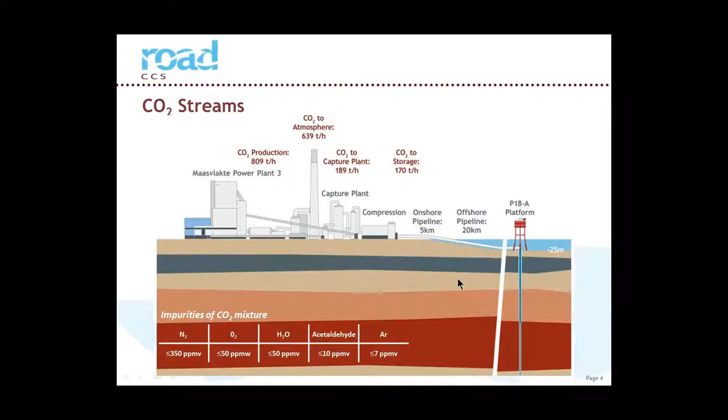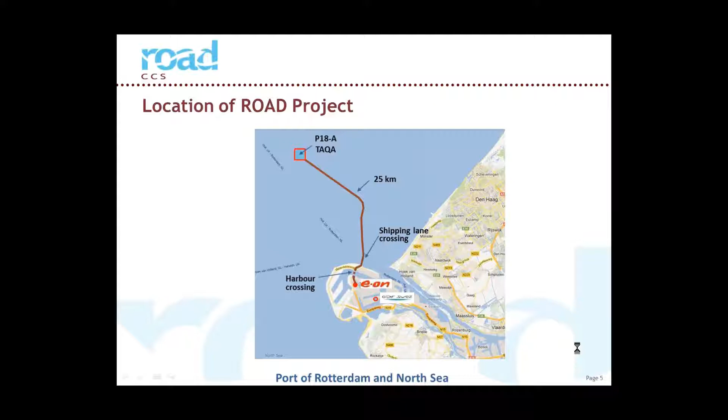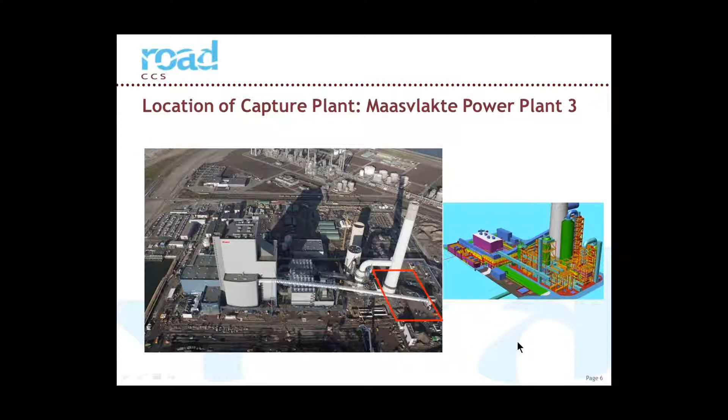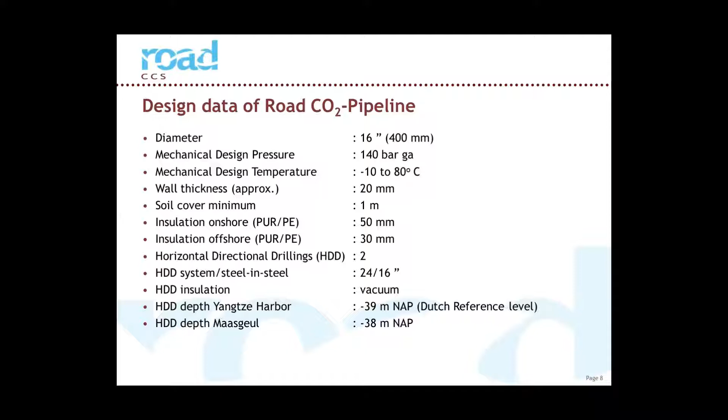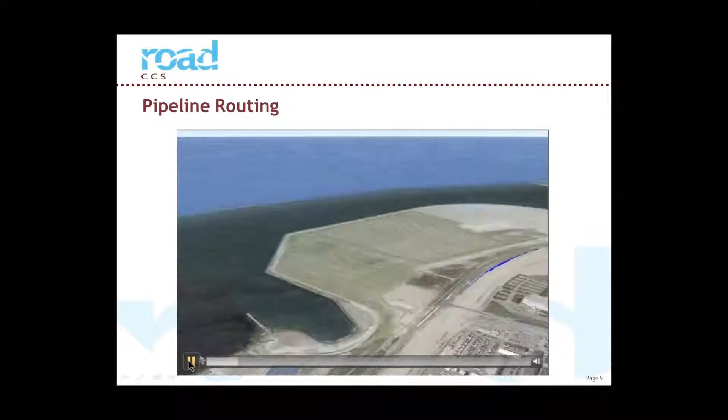We started at the E.ON plant, and then the pipeline runs over the road side till it reaches here at the cursor. It reaches the pipeline corridor of Rotterdam, and follows the pipeline corridor until it reaches the Yangtze Harbor. This is the Yangtze Harbor.

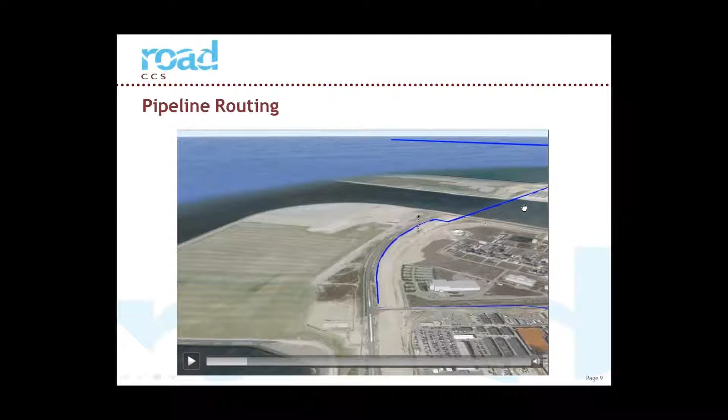Under the Yangtze Harbor there's a directional drilling, and the directional drilling comes above ground past the Euromax area, which is a container harbor where a lot of containers are stored. So we pass under the Euromax area.

From there we go into the pipeline corridor again, follow the route to the border of the Maasmond, where we have another directional drilling.

This is the directional drilling under the Maasmond. It's also 40 meters deep, to make sure that all the ships reaching Rotterdam do not have any problem with the pipeline. From there the pipeline continues in the seabed with a coverage from 1 meter to the TAQA platform, which is located here.

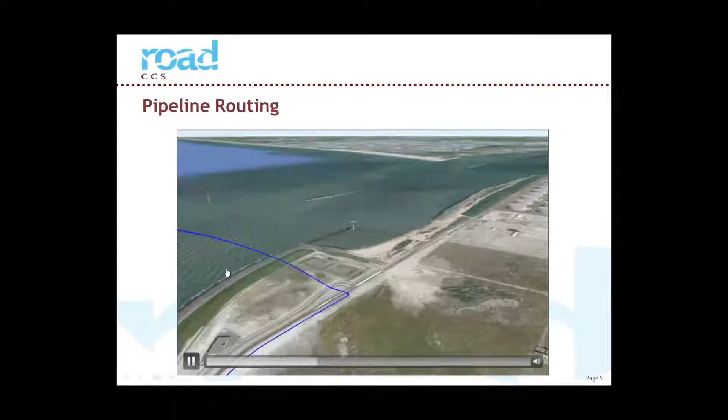You will see it in a minute. It gives you a nice idea how the pipeline runs. The offshore part is about 20 kilometers. There's the TAQA platform.

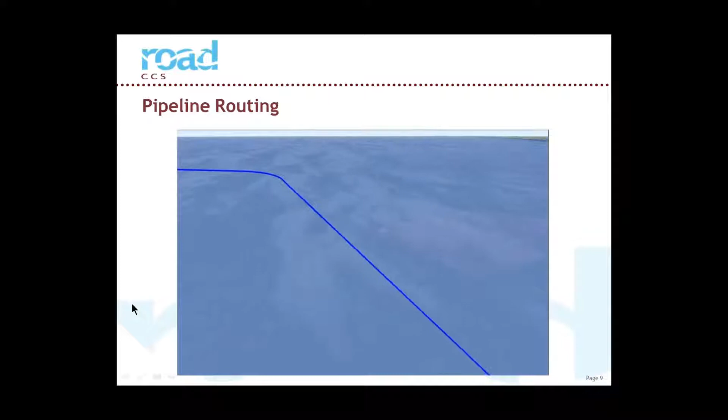Now you can imagine how it looks. Huh? I don't know where it stops, sorry.

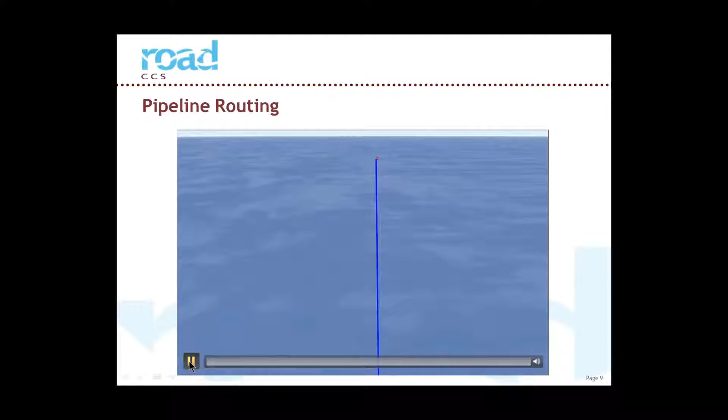To take a closer look at the onshore part, you see here the Yangtze Harbor, which was not yet finished when we made this picture, but now it has been taken away, so it's now a real harbor. And this is the Maasvlakte. This is the entrance to the Rotterdam harbor, where the big ships can enter and go into the new Maasvlakte to deliver their cargo. The E.ON plant is here.

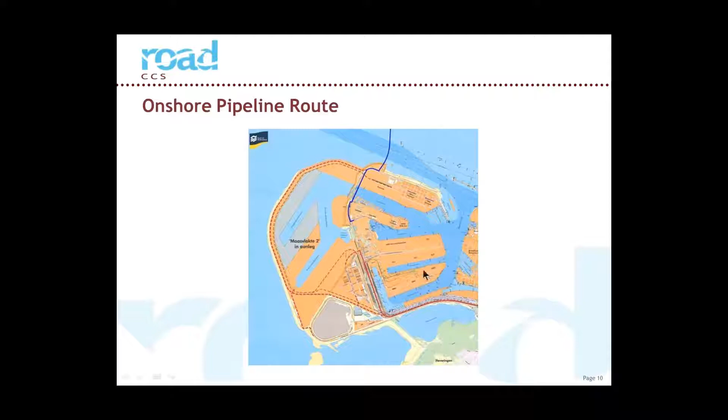As I mentioned, the pipeline can be operated at high temperature, mainly in the beginning of the storage period. This means the pipeline will be hot, about 80 degrees, and since it's constructed at a temperature of 10 degrees, there will be a tremendous expansion of the pipeline in operation.

To cope with that expansion, the pipeline is equipped with expansion loops, and because of the stiffness of the pipe, these expansion loops have to be a big size, as you can see here. This leg is 6 meters, this leg is 8 meters, then again 6 meters back. Because the pipeline corridor is used very effectively with a small distance between the pipes of 400 millimeters, the expansion loop has to go under the future pipelines to ensure efficient use of the pipeline corridor.

You can also imagine that when the pipeline is hot, these pipelines are in the warm zone, and that's why the insulation of the onshore pipeline is thicker than the offshore pipeline, to protect the other pipes that will be constructed above our pipeline.

This is a picture of the Maasgeul crossing. It is a very interesting crossing - a very long, deep crossing.

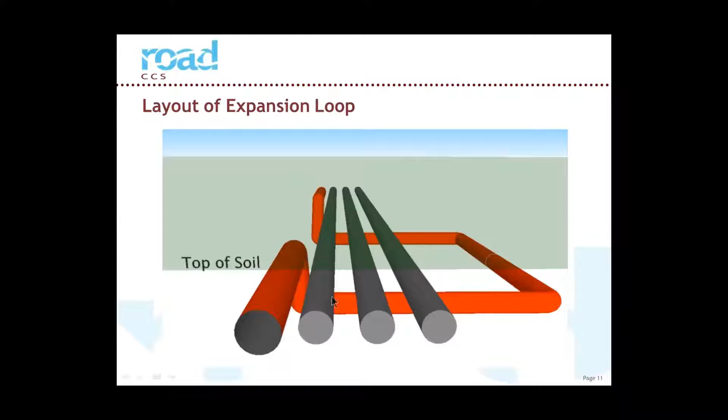First, a small hole is drilled under the Maasgeul. When you reach the other side, there is also an additional drilling made for the mud return line. So when the small hole is ready, it is reamed and supported with mud so that it doesn't collapse.

The mud is returned through the mud return line to the shore. The sand is taken away and the mud is reused until the hole has the size required to pull the line. In the meantime, the line is constructed onshore.

It's pulled through the hole with the ship from offshore. This ship is the pulling mechanism to pull the line.

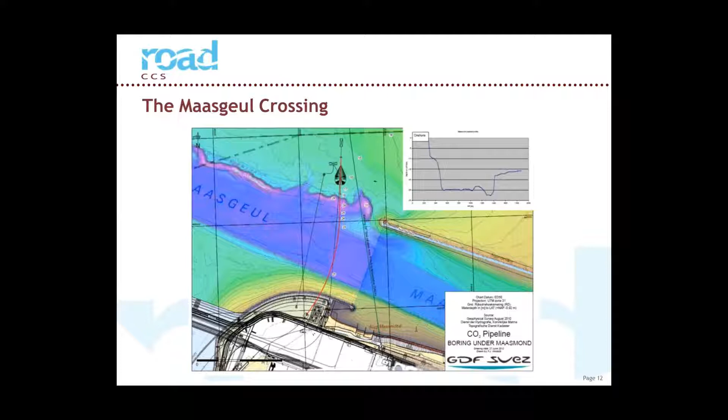At the end of the pipeline there is the TAQA platform shown here, and you can see at the horizon there's the Maasvlakte, so it's a rather small distance - about 20 kilometers. The platform is located on the gas field at this location, and the well we are using is the P18, which has a volume of about 7 to 8 million tons, which we use first to store the first batches of CO2.

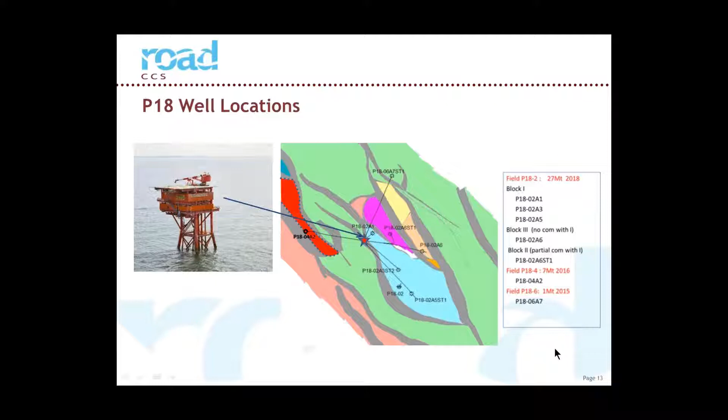The well itself is indicated here. It is a 5.5 inch well pipe. There's an internal pipe with a restriction at the bottom, and you should keep in mind that this restriction causes pressure drop and velocity increase, which is important for the design of the flows through the well.

It's also interesting that here you see a subsurface safety valve that can shut off the well in case something happens.

Then we go to the CO2 itself and the flow assurance. First, some facts and figures.

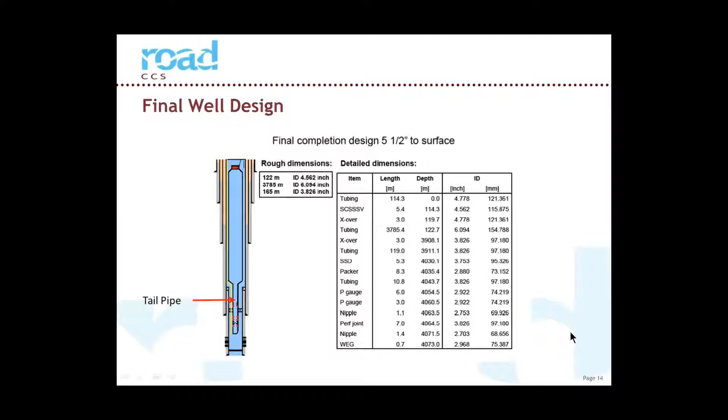The E.ON Maasvlakte power plant has an output of 1,100 megawatt, firing coal, with an efficiency of 46%. It's operational, presently in startup phase, and expected to be fully operational this year or next year. Equipment is already installed to make sure the capture plant can smoothly be connected to the Maasvlakte power plant.

The capture plant is a post-combustion capture plant, meaning the CO2 is removed after the combustion of the fuels. It has a capacity of 250 megawatt equivalent, so about a quarter of the output of the Maasvlakte plant.

The capture volume is 1.1 million tons per year, meaning a maximum design flow of 47 kilograms per second. Using this flow, the reservoir, the P18-4, is filled in about 6 to 7 years.

The transport capacity in the 16-inch pipeline is 1.5 million tons of gas per year, while in dense phase, 5 million tons per year can pass through the pipeline.

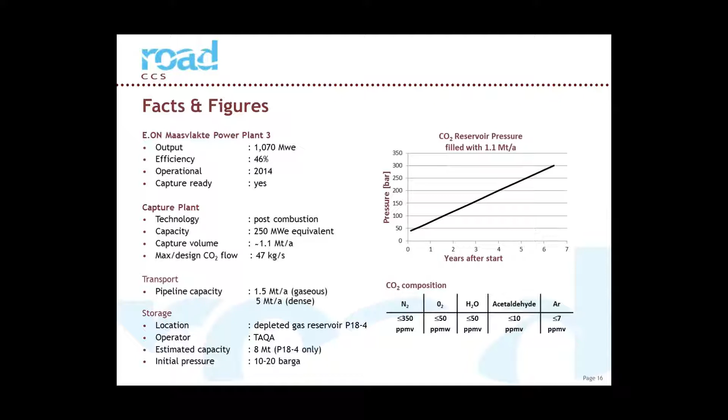The transport and storage system is schematically indicated here. The CO2 is coming from the capture plant, from the CO2 stripper, so the liquid saturated in CO2 is heated, and CO2 comes out.

The CO2 is collected in this accumulator where the water falls out, and the CO2 gas leaves over the top into the suction of the compressor. From there, the compressor compresses it to about 100 bar and feeds it into the pipeline into the reservoir.

The compressor is an integrally geared compressor with 7 or 8 stages, and after 4 stages a drying unit is installed to dry the CO2 to the specification of 50 ppm or less.

The compressor is not controlling the flow of CO2. The flow of CO2 is controlled by the amount of CO2 that's taken out of the stack. The compressor makes sure that all the CO2 given to it will be compressed at the required pressure by the process, and the temperature is controlled by cooling the compressor discharge with this cooler.

There are some controls around the compressor to make sure it can have a steady operation with fluctuations in the feed and discharge. This is a minimum flow bypass control to make sure there's always enough and sufficient CO2 going through the compressor, and in case there's not enough, CO2 can be returned to the CO2 absorber, to give a smooth operation.

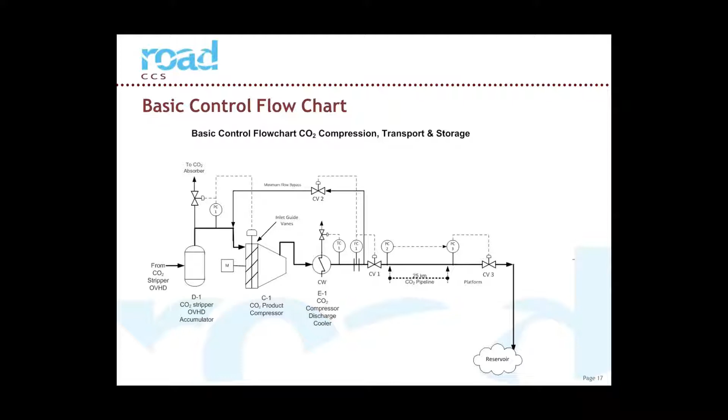This is an estimated curve of the compressor, and it shows how the control of the inlet guide vanes work. When a certain flow is required, you can vary the discharge pressure of the compressor by going to another angle of guide vanes, while the compressor can also be turned down to a lower flow by going to another guide vane position.

This is a combined curve of all the 7 or 8 stages.

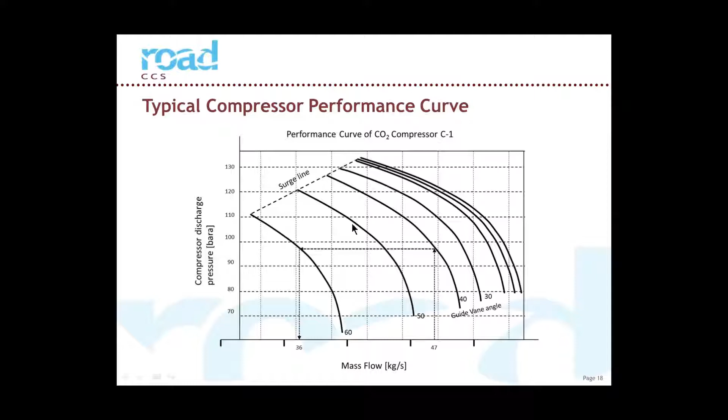As we have no intermediate storage, the capture plant has to closely follow the operation of the power plant. This means the transport and storage equipment should also be designed such that the whole system can follow all the starts, stops, shutdowns and normal operation of the power plant. So we gave sufficient emphasis on normal operation, startup and shutdowns to make sure the whole system has a sound and safe operation without any problems.

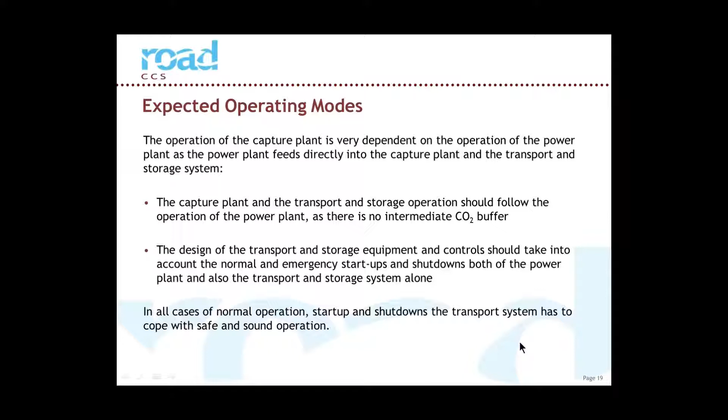CO2 is a very sympathetic material. It has a very low critical pressure, which means under conditions reachable by us, you can go from vapor to liquid and to the dense phase. Dense phase is a thermodynamical status that represents a phase that is neither liquid nor gas. It has the properties of both - you could say it's a gas with a very high density, or a liquid with a lower density, but it behaves like a liquid.

When you let the gas CO2 flow through a pipe from the wellhead into the bottom, you have to apply high pressure at the wellhead to store it at around 20 bar. Later, when the pressure of the well increases, you transport in dense phase, meaning the pressure of the wellhead is lower than in the reservoir. It looks like the CO2 is falling into the reservoir, so the pressure here will be around 85, 90 bar, and you can even reach close to 300 bar down in the reservoir because of the gravity that pulls the CO2 into the well.

In the gas phase you have a low static pressure drop and a high velocity, which causes a high friction pressure drop. In the dense phase you have a high static pressure drop - it's a heavy liquid - you have low velocity and a low friction pressure drop. That is the mechanism that makes sure we can, with a low pressure, fill a high pressure reservoir.

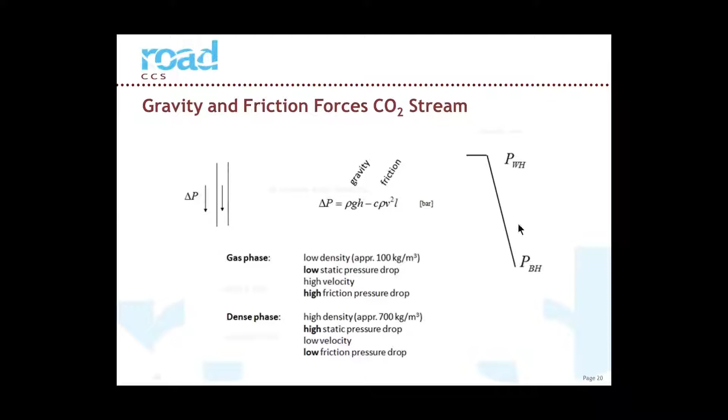Simulations made with the Olga program have indicated that the temperature of the well piping can be very low, and since we have a design temperature of -10, we must make sure that we never come below -10. That can be done by diminishing the quantity of CO2 that is flowed into the reservoir, especially in the low reservoir pressures, which is the blue color. It means you have to feed with a lower flow to make sure that you don't reach temperatures below -10.

Another limitation opposed to the well is the temperature of the downhole, because at plus 15 degrees CO2 tends to form hydrates, at 15 degrees and below. So we want to make sure that we always stay at the bottom of the well above 15 degrees.

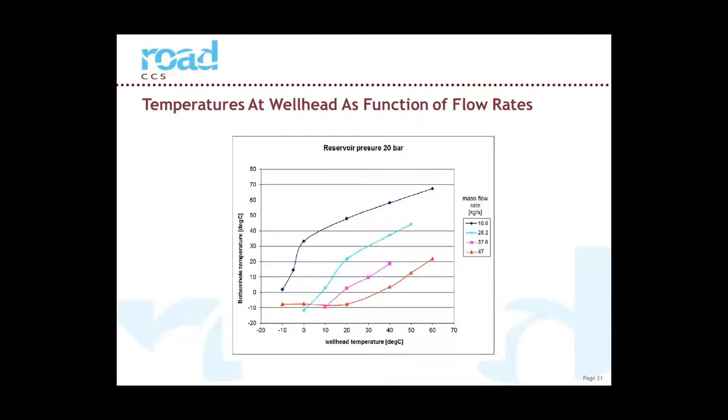The study has shown that when we operate according to these lines, we will stay out of the region of the minimum downhole temperature and the mixed flow that could occur.

When we have no platform control valve, meaning the pipe is open on the platform, the chance of mixed flow is higher, and we have to stay at a high temperature to avoid mixed flow into the well piping. While using a platform valve, increasing the pressure of the pipeline a little bit, only the limitation of the downhole temperature will be valid.

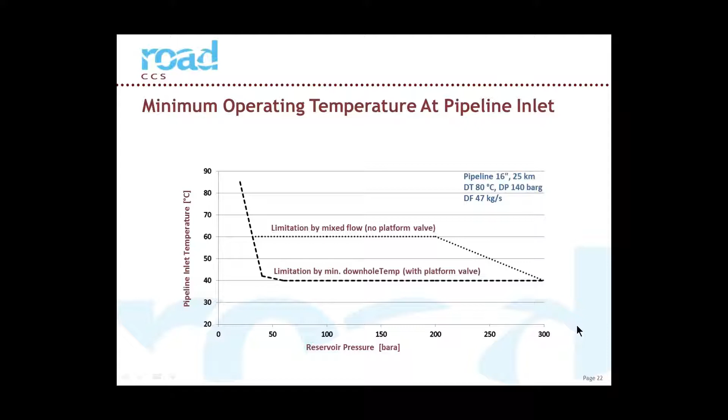Adding a control valve at the wellhead will cost energy, but only in the beginning. At the end of the operation, when the reservoir pressure is higher, you will gain it back, because instead of this pressure, you can operate for a long time at 85 bar, which gives a reduction of energy cost.

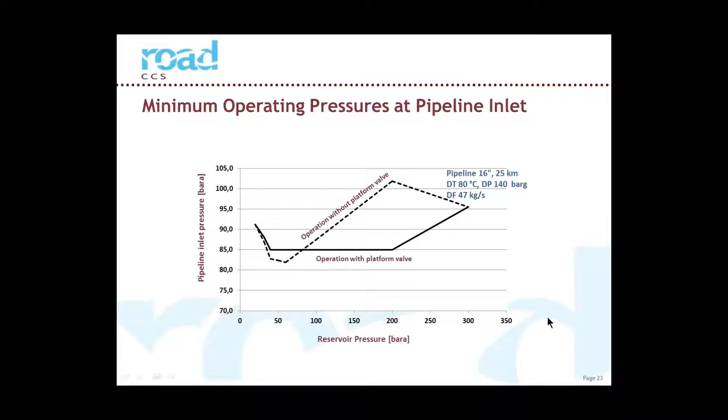When you combine the two graphs before, this is the operating envelope we should use to make sure that in normal operation we don't get any problems with slugs, temperatures, and so on. So this is basically how the pipeline should be operated.

Initially, the pipeline has to be hot, and then after maybe half a year, we can go to 40 degrees and stay at 40 degrees. The pressure is also high at the beginning because of the gas that has a higher friction loss in the pipeline and the well piping, and when the pressure is higher,

we can stay at a lower pressure, 85, and at the end, when the pressure in the well is very high, then you have to increase the pressure to make sure you get everything in.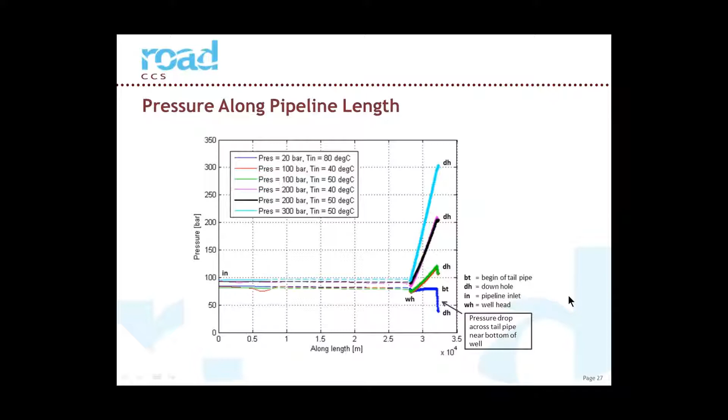When you have to shut down the plant, the pipeline is filled with one phase. When you shut down the pipeline at high pressure, it will cool down to the seabed temperature, around 4 degrees, and you might get a considerable amount of liquid. That is represented here. When you shut the pipeline, it will cool down according to this line.

You will end up with a vapor weight fraction of 0.22, that means 78% liquid.

While when you heat up the pipeline before you close it in, you go to, let's say, 80 degrees. Then when it cools down from 80 degrees, you have only 42% liquid and 58% vapor weight.

So that means that when you operate at higher pressure, it's even better. And when you have the possibility to close the valve at the compressor side and open the valve at the wellhead, you can first heat the pipeline and then let the pipeline flow into the well.

And diminish the pressure. That means that as the pressure cools down, you miss this vapor liquid region and you end up probably here or there, but you don't come into the liquid.

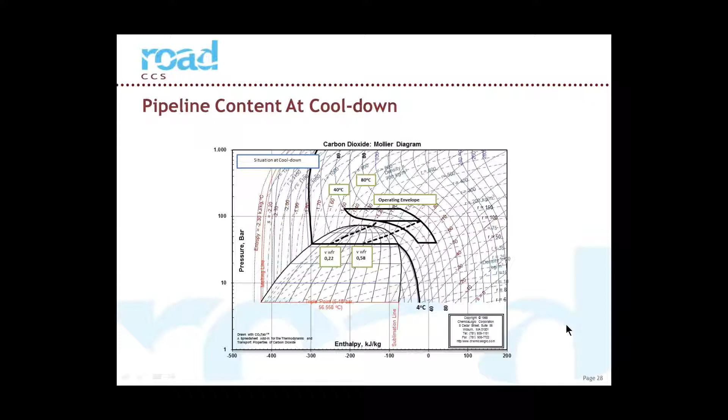We have investigated all types of startups and shutdowns, and here is a representation of the planned startup after a planned shutdown. It means you have to shut off the pipeline, and it ends up filled only with liquid, then you have to pressurize the pipeline again, and purge it with hot gas.

You open the control valve slightly, at a pressure slightly above the wellhead, and you keep good track of the temperatures on top and below in the well piping to make sure you stay within the given limits. When all possible slugs are gone, you can increase the flow to the normal operating flow.

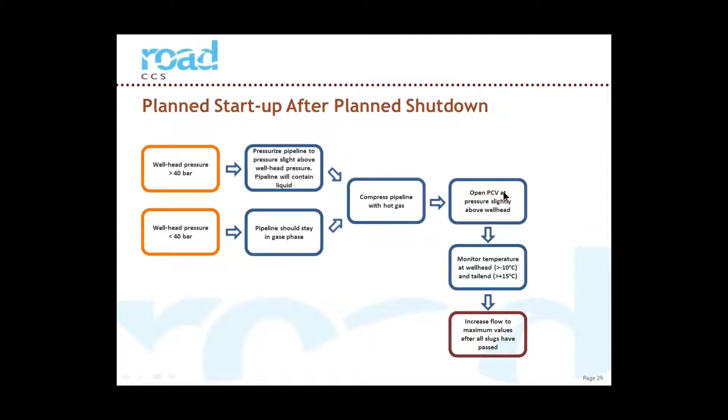Now this is the planned shutdown I talked about already. You heat the pipeline content to 80 degrees, and empty the pipeline with a closed compressor valve into the well, and you close the well with the pressure control valve on the platform just before backflow from the well will occur.

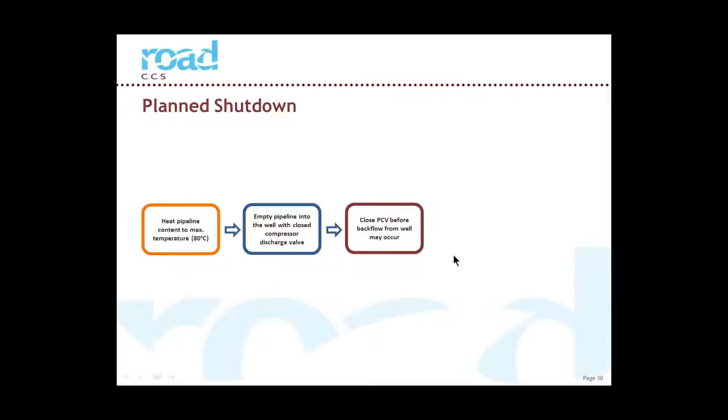But it's not only planned startup and shutdown that will happen. Sometimes there might be a non-planned shutdown because something is wrong and the platform valve is closed. In that case, you're not able to empty the pipeline into the well, and then you have to decide what to do.

Do I expect a long repair time? Then it's better to shut down the capture plant, and the pipeline will be filled with liquid because it's cooling under pressure.

When the failure is repaired, you can start the pipeline at slow speed to make sure only small slugs pass over the control valve, and when they're all gone you can speed up to normal operation. When you expect a short repair time, just continue to fill the pipeline with hot CO2, it might cool a little bit, but you can start up without problems.

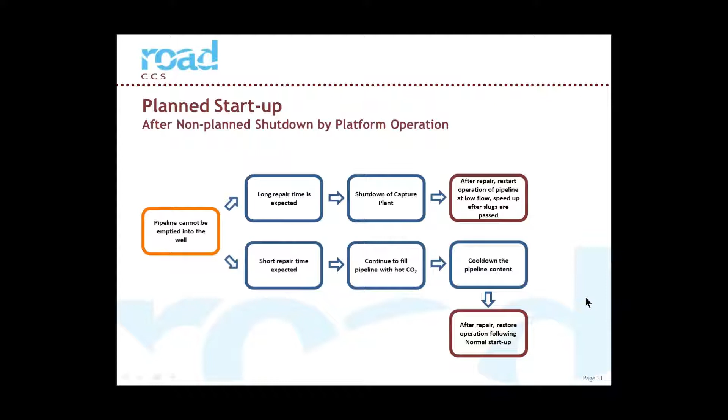When there's a problem at the capture plant, the compressor discharge valve will close. In that case, the pipeline is cooling down, and there might be a lot of liquid in the pipeline, so you should start with monitoring flow and temperature to make sure that no vibrations or temperature problems occur.

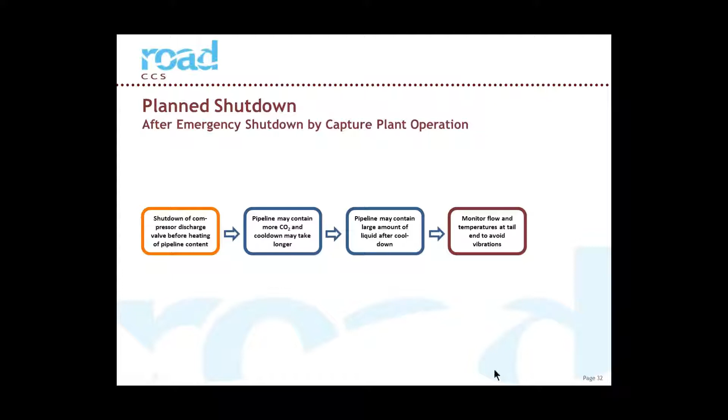Finally, we have a few recommendations. It is recommended to investigate the possibility that CO2 can be injected without any heating, and to make sure that you can handle the slugs in the well piping. That is an advantage because then you will be able to transport CO2 to low pressure fields at a larger distance, at a reasonable cost, because you can transport all the time in the dense phase, and you can use cold CO2 transport without insulation, which is a cheaper solution. This was my presentation. Thank you.

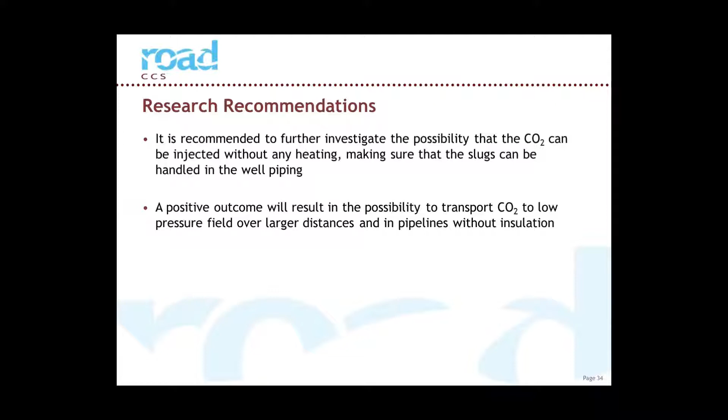Thanks very much, Jan, for that excellent presentation. I'd just like to encourage everyone to submit your questions in English directly into the control panel, which should be on your screen now. We had one question early on in the presentation, Jan, which I think you sort of addressed later on, but I'll still pose it to you: just explain the rationale for transporting the CO2 at up to 80 degrees Celsius.

Stay with the downhole temperature above +15 to avoid hydrate formation. You can work out that you have to start at a high temperature to make sure that due to the temperature losses, you never reach this low temperature.

Yeah, okay. And maybe you can add something. One of the issues is that to begin with we have a very low reservoir pressure, and we have this narrow tailpipe at the bottom of the well, so we get a big pressure drop and a big Joule-Thomson cooling at the bottom of the well. And we want to keep the well warm enough that we won't get hydrates, and we certainly don't want ice. So we have to work backwards, basically, from the downhole temperature, and we have to operate the pipeline to begin with very warm.

Okay, great, thanks very much for that. Right, the second question I've got here is that CO2 with water is very corrosive. What are the materials that you're using for the pipeline and the well, and do you take into account the corrosion rate and life duration?

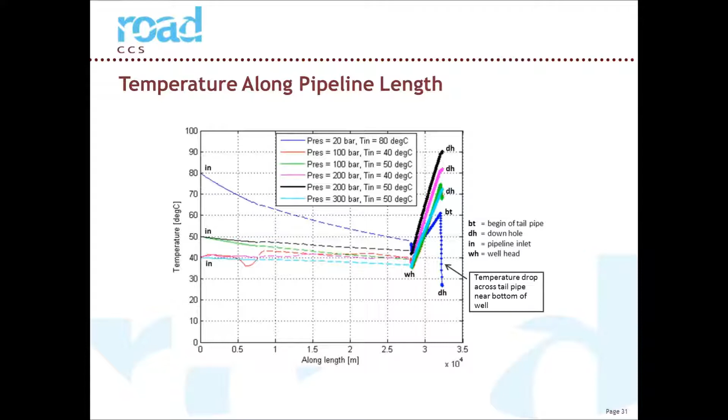The CO2 and water are indeed very corrosive, but only when the water is present as free water, not as long as the water is dissolved in the CO2. The quantity of water we allow in the CO2 is such that it will always be dissolved in the CO2, so no corrosion will take place. That's why we're using plain carbon steel for the construction material. We do have stainless steel in the well, because when the well is shut in, you will get reflux, so the well is designed to withstand CO2 and water corrosion. Even then, we don't really expect it to happen, because once the well has been running for a while, we expect all the water to be pushed away from the well.

Okay, great, thanks very much. Our next question here is, why did Road decide on a pipeline diameter of 16 inches? And was this size designed for a 1 million tonne per year operation?

Can I give the history of that? Yeah, sure, go for it, Andy. When we originally sized the pipeline, we hadn't done the detailed work on the reservoir and selected the individual reservoir P18-4 to start with, but we also need to be able to operate with P18-2, which has multiple wells. So in the design case for the pipeline, we don't have the high pressure drop across the well. And P18-2, like P18-4, starts at a very low pressure.